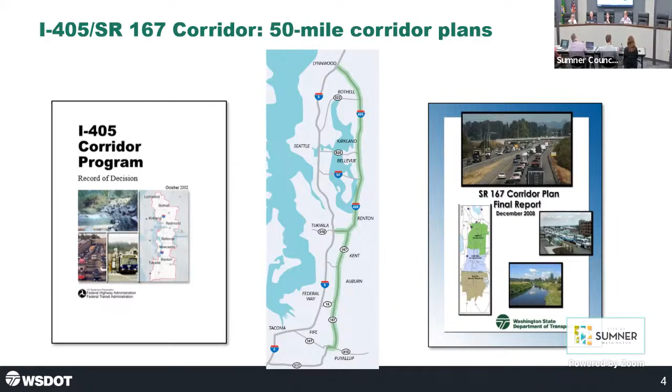On a personal note, I was born and raised in Western Washington. I grew up in Burien, and my family goes back 6 generations here. It's easy for us to sit here today and think about what Sumner, Burien, or Seattle is going to be like. But I remember picking apples in orchards in downtown Bellevue as a kid, and when I was growing up in Burien it was horse pastures where you could go salmon fishing in the streams. That's not what it is now.

I have discussions all the time with people who are new to the area, which is a lot of people, trying to say it's one thing to look back 20, 40, 50 years. It's another to try and look forward that same time period and think, what do we wish we'd done? What forethought do we wish we'd had to get to a functioning transportation system that allows us to build well? Most of the time that's not something our state agency has the opportunity to do, but when we develop a master plan, that's effectively exactly what we're doing.

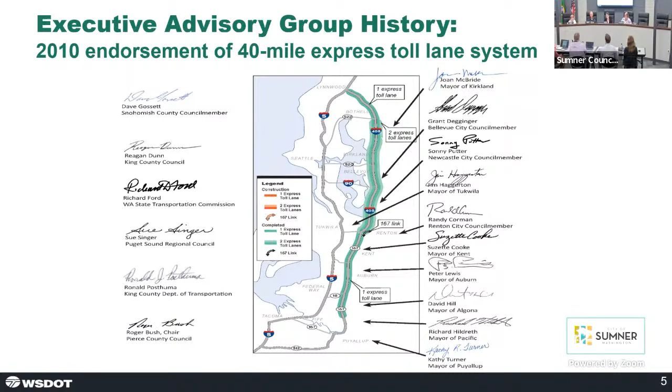There have been a number of these different letters over time, and depending on where we're focused as a program and what the specific needs of that town are would probably explain most of that. Most recently, as we moved forward on a couple of large pieces of the 405 corridor, the letters were really focused on the 405 stakeholders. As we talk about potential next steps for the master plan, the majority of the stakeholders supporting that would likely be in the South—I'm guessing that probably explains it.

The 405 corridor is laid out here, all the way down the 167, essentially the managed portion with toll lanes and HOV lanes. The long-term vision includes dual express toll lanes, new direct access and interchange improvements, high capacity transit—typically known as bus rapid transit or BRT—and non-motorized pedestrian and bike connections.

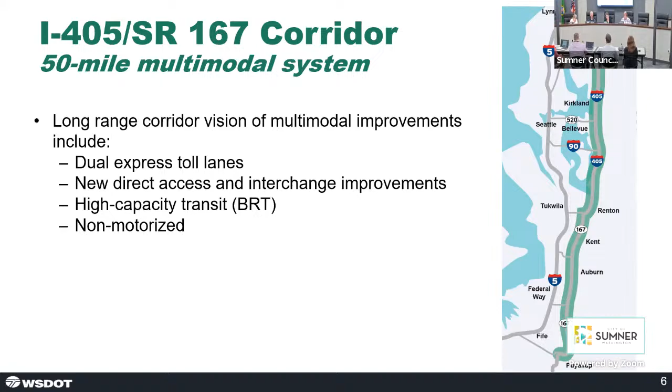We're excited to share that the SR 167/SR 410/SR 18 northbound congestion management project opened last August—I'm sure everybody here has already been driving on it. The $47 million project, delivered by DOT's Olympic region, provides a 9-mile northbound HOV lane on 167. The extension begins near 410 in Pierce County and ties into the existing HOT lanes near Auburn and King County. It delivers much-needed improvements for people in the South End and the State Route 167 corridor, as the new northbound HOV lane completes nearly 20 miles of the managed system. We're pleased to see commuters utilizing the new lane a lot, but while it's an important piece of the puzzle, it's just a piece.

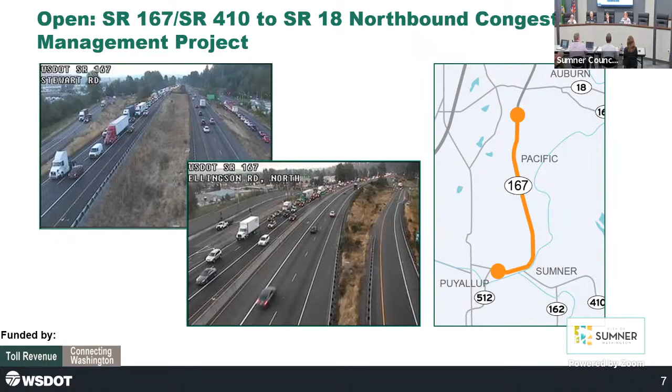So moving on to the next corridor improvements—this is funded by toll revenue through Move Ahead Washington. The next major project for the South End is the 167 Corridor Improvement Project, which will bring benefits to the corridor by adding strategic capacity on 167 and providing system-wide consistency for travelers.

The project will upgrade the really old current toll system on 167 to include photo tolling and destination pricing to help us better manage all trips. In addition to improved management, it also adds consistency. As the council is likely aware, somewhere in the range of 40% of users on South 167 also end up utilizing 405, and it can get a little confusing—I deal with this every time I drive through 167, figuring out the hours, occupancy, and tolling here versus there, plus the fact one place has photo tolling and the other you flip your transponder. We're trying to maintain consistency for a better driver experience, as well as the management of traffic.

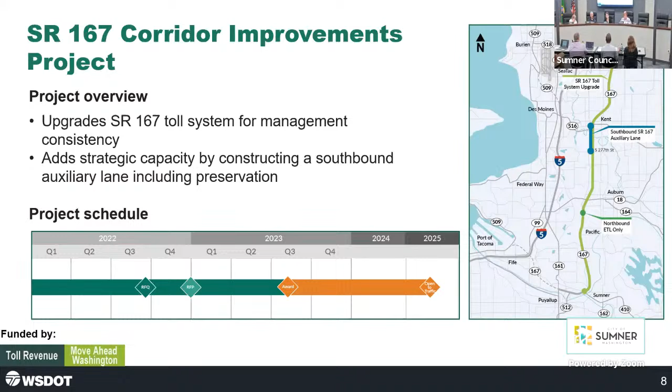Moving on to the next project, funded through toll revenue and Move Ahead Washington: the $83 million SR 167 410 to SR 18 southbound congestion management project, the companion to the northbound lane that's already open. This project will begin preliminary design and engineering this year and deliver over 6 miles of new managed lanes between Pacific and Puyallup.

The project will bring substantial congestion relief to southbound travelers and will nearly complete the 50-mile managed system through the 405-167 corridor. It's expected to be awarded in 2025 and open to traffic in 2028, which aligns well with the opening of the Puget Sound Gateway project from 167.

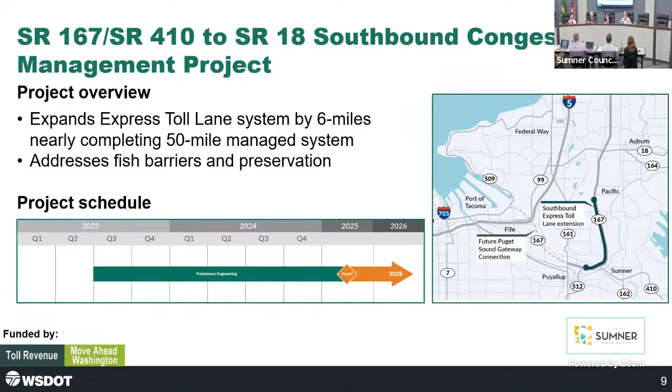Moving up north to Renton to Bellevue - for anyone who's driven north, you've seen a lot of construction on this project. We've been making progress on the Renton to Bellevue widening and express toll lane project. The team continues to work hard to deliver this critical project, which will bring multimodal transportation and safety improvements to the corridor.

This is the missing link that connects the two systems - the existing toll system on 167, and what's been built on 405. This is the link that connects those two, and then we have work on either end, on 167 and north on 405.

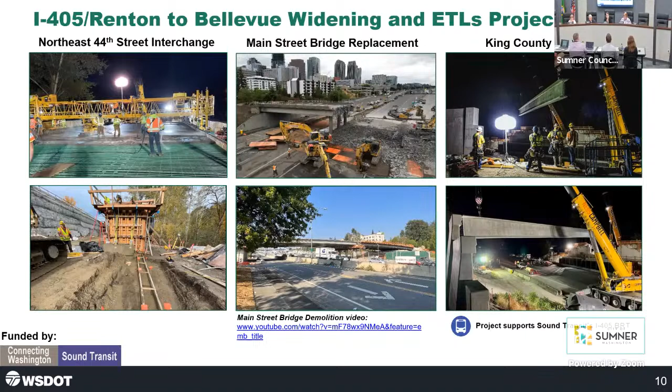This project is currently in active construction. For any of you who use the corridor that far north, as the weather dries out and warms up, this is going to be a very big construction area. You may have already noticed a lot of work going on at the May Creek Bridge.

We already mentioned the Renton to Bellevue construction project - that's a big one, north of $700 million. 132nd is in active construction; this is the second of two seasons, with the current schedule showing it wrapping up later this fall of '23.

The Northeast 85th Street Inline Station project, which is almost entirely funded by Sound Transit, just entered construction. I think I saw my first cones go out last week, and the next couple of seasons will be very busy for that one.

Upcoming, a big one for the 405 corridor that many people from your area will utilize is Brickyard to 527. This is also somewhere in the range of a $500 million project, a very large linear project, including new bridges on the Sammamish River and a number of new improvements to help support the BRT station or BRT system. That's a big one that will be upcoming.

I won't mention the other ones - I already covered the 167 projects you saw in here. If you have any questions on any of those, I'm happy to get to that later. So now I'm going to hand this over to April.

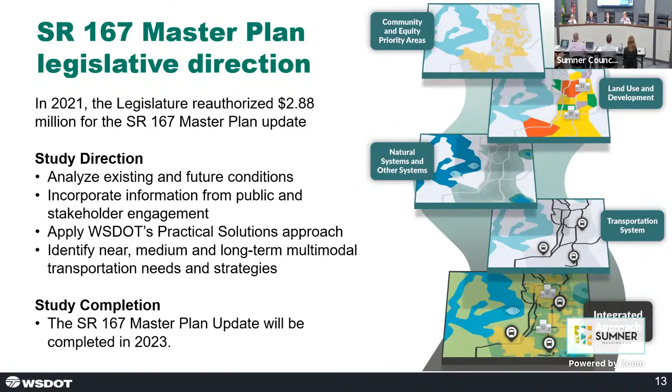I'm going to walk you through the phases on this one. We really approached this in 5 steps, trying to make sure that we were diligent.

That first phase was about listening. As we're walking through these steps, trying to understand what is the long-term vision for 167 and the constituents that live or work down here. What is important to your residents and the people who work in your town? How will we make mobility better, and what are their priorities?

Phase 2, for existing and future conditions, really was focused on trying to understand the lay of the land. What are environmental concerns? What does congestion look like? Where do we have sidewalk gaps? As we're looking at growth, where do we have places and trails? And then future conditions looks at what happens if we do nothing. As we grow and plan for both employment and households, what does our future look like for congestion and mobility if we're not able to build anything? That phase was focused on data, but also on getting our partner feedback and making sure we understand all the pieces as that data comes in.

Phase 3 was really about developing and screening strategies - that's one side of the term, because projects are kind of another form of that. One important thing is this is a multimodal and multi-agency plan. 167 does not happen in a vacuum; it interacts with a lot of local streets, cross streets, and other modes. So we started with local plans, your transportation improvement program, a comprehensive plan, to make sure we understood what are the projects that are happening and planned and cared for by your community that are important to highlight in this master plan effort. Then what are some of the deficiencies on and off 167 that we need to understand and start developing projects and strategies to address. We worked with WSDOT experts as well as our partners to start identifying solutions to some of the toughest challenges for mobility on our corridor.

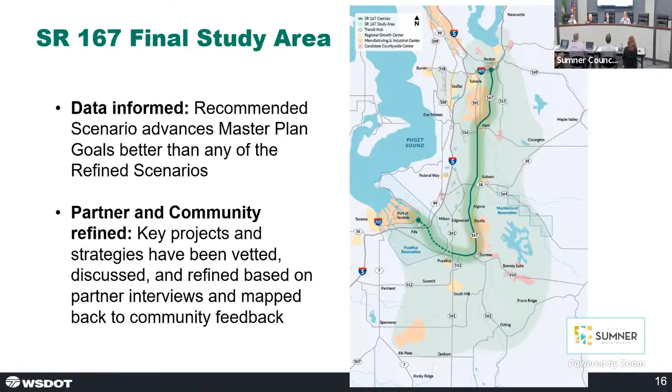A bit on our process as we got here: we went from listening to developing a vision. Where do we want to go? What does mobility need to be on 167? Then to developing our goals, supported by the needs. How do we get there, and what are the key pieces we need to factor in? Our metrics and measures show how we're doing as we progress on these goals, and then that scenario development process I highlighted earlier finally gets us to the final study recommendation. One key piece is that your staff was along the way for this entire thing, giving feedback on each of these steps to make sure your perspectives were shared.

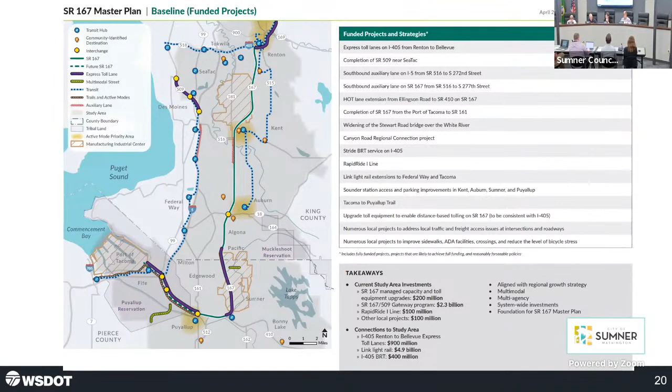A quick stop on this slide - we were not planning in a vacuum as we were going. There are a lot of things going on that form a baseline, funded projects that we really wanted to build our recommendation on. It was important that we leveraged the investments already ongoing, including some referenced by Rob, and build on that going forward to make sure we're increasing mobility.

And then this is our recommendation. I have a full list of projects in front of me, but I'm going to go through a couple that I think are important to mention. One of the hallmarks of the recommendation, more of a linear facility, is a second express toll lane.

For the entire corridor from 405 down to 512, the 167 completion project. This will match the dual express toll lanes that are now going in on 405.

Do we have those in our PowerPoint? You should have this slide, but I also could share this recommendation graphic with you afterwards, because I know it's hard to read. Yeah, because by the time it gets to us, it's pretty small. No worries, I completely understand. I am happy to share that graphic. I'm also happy to share the full list of projects that can be shared by Michael after this meeting. All right, thank you. Oh, no worries.

So another one I thought was important to mention is the 24th Street East interchange improvements. There are interchange improvements all up and down the corridor. One thing we heard over and over is the importance of freight staying off local streets and on 167, but the reality is it interacts with active transportation, which is challenging to make both work. So as we looked through different interchange improvements, this one is really focused on making sure freight and complete streets and active transportation can operate in a safer place as we move forward.

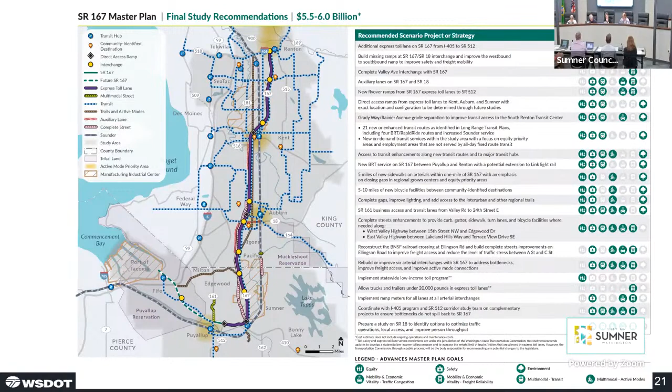Lastly, one thing we heard and found when looking at plans adopted by different cities is that everybody's in a different place in terms of identifying trails and active transportation, from sidewalks to bicycle networks. So we have programmatic buckets for each of those, and we have specific projects, including some in Sumner, listed as efforts already underway.

Quickly, since I know I'm approaching time, on engagement: we reached a lot of people in our outreach last fall. We had two online open houses, the last one ending April 15th of this past month, with over 11,500 visitors to that website and quite a bit of feedback that fed throughout the process.

That first initial online open house was last summer, and we used a lot of what we heard to frame and refine the recommendation and specific projects, to make sure we were putting the right projects in to address issues.

Finally, next steps: we've already had our last technical advisory committee meeting. We have our last equity advisory committee meeting coming up this Friday, and our last policy advisory committee meeting on May 23rd. For the master plan, I shared the draft report with your staff last month, along with a letter of support template, and I'll be resharing that later this week.

We're really hoping to start wrapping this up as we show our work and document the support, so we can start the heavy lift—hopefully together, making it not so heavy—of delivering this vision.

One last piece on that unfunded work—we are working on this. We were talking before with Michael about how we go from here and start getting implementation funding to focus on delivering these projects. That is our next goal.

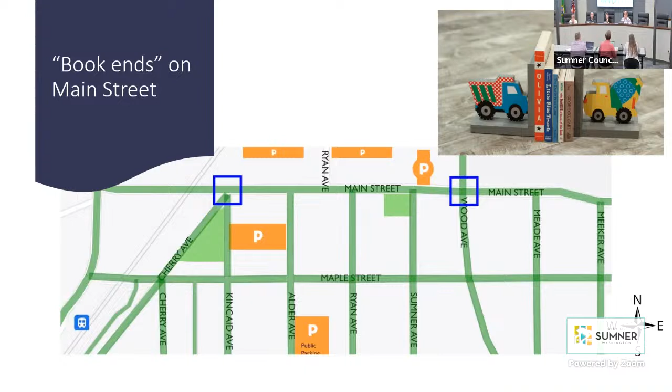But with that, I'll hand it over to Elisa to talk about some of the project challenges that we've experienced and what's ahead in the future.

So we talk a lot about the woonerfs and what we see over at Heritage Park, and that's really the more visible side of the TCUW project. But really what started this whole project, as we all know, is the utilities we were trying to make improvements on underneath. So I grabbed a couple pictures of prime examples of why we are doing what we are doing and currently wrapping up.

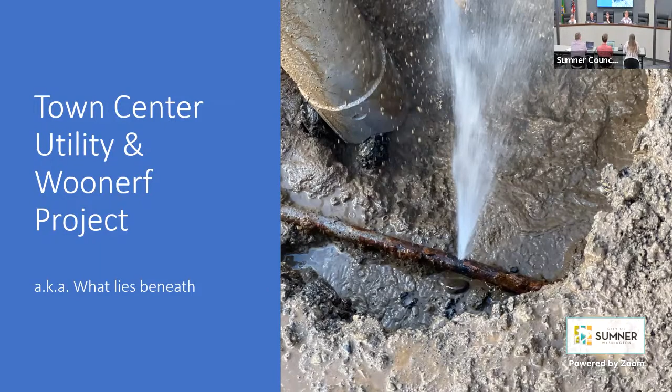This is one of the many water leaks we encountered along the way on our old water lines. This is replacing the sewer laterals on Cherry. Right before we actually started working over on Cherry, we had a sewer lateral break, which was timely - rather have it happen before than after. So that prompted us to replace all the sewer laterals on Cherry before we put them under nice, pretty concrete.

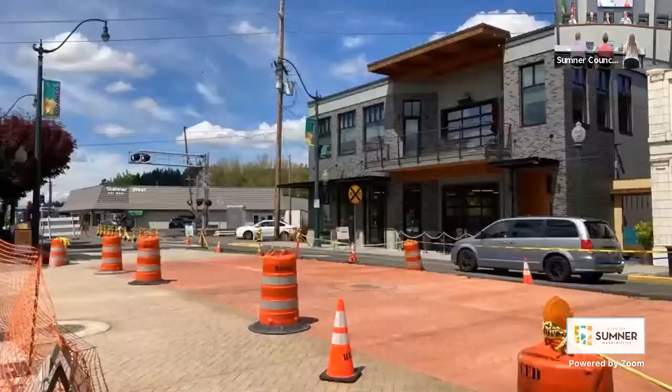And this is one I took this afternoon out at the intersection at Main with Cherry and Kincaid. Half of the intersection is done, and it's really starting to look like our plan - our end goal of nice colored stamped concrete, curbless streets, and really pedestrian friendly.

So this one is wrapping up, if you can believe it or not. I'm not going to commit to any end date yet, but we are wrapping up. We've been very busy in the last month, and will continue to be very busy in the coming month getting everything put back together.

So we have May on our calendar, we have June on our calendar, and July is not really on the calendar yet. I'd say we're shooting to have a lot of work done in May and June, and hopefully a lot wrapped up by the end of June.

On that last picture of the crosswalk - is that a signal crosswalk or just a regular one? There are no signals.

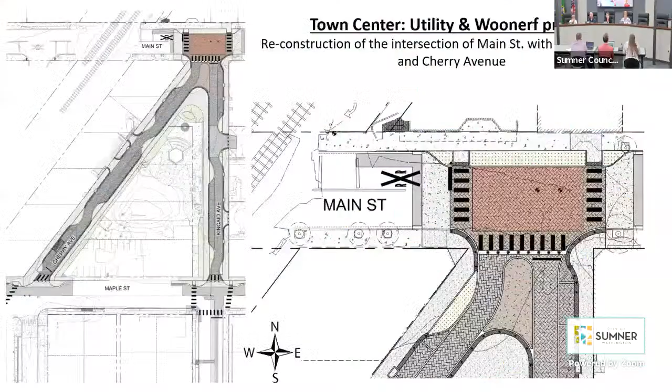So at the top, this is phase one, which we are currently in up on Main Street and wrapping up this week. Next week we switch to phase two.

Elisa, I'm sorry to interrupt you - can you go back to that last slide? This one. Yep, and just tell council what's happening Tuesday and Thursday, because I think that's important to understand the magnitude, and the good things.

As part of wrapping up phase one, we have finished, as you saw in the photo, the concrete intersection at Main, Kincaid, and Cherry. What is happening tomorrow, Thursday, and Friday is that we are grinding and overlaying a number of the streets we have been working on, putting them back together, including a block of Main Street between Kincaid and Alder.

So tomorrow morning, they will be grinding just the south lane, so it'll be in alignment with the concrete we already did, and when we come back we'll do the other half in phase two. Tomorrow morning they grind that south lane, the eastbound lane on Main Street between Kincaid and Alder, and Thursday morning they'll overlay it.

The rest of the streets in this first wave of grind and overlay are Alder from Park to Maple, as well as Academy from Fryar to Kincaid.

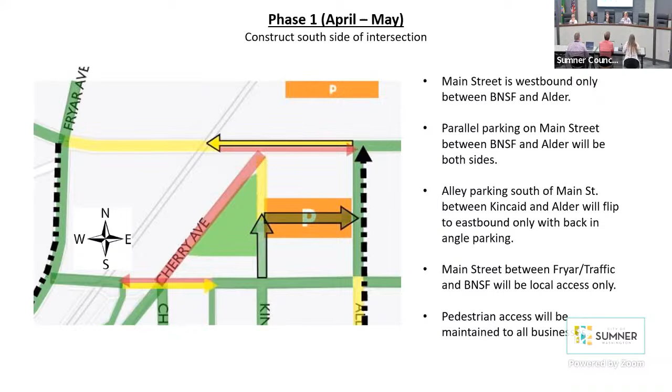Thanks for that reminder, Jason. So phase 2, starting on Monday, we will flip the intersection at Main Street so that it is operating in an eastbound only configuration on Main Street. That means no westbound movement on Main Street between Alder and Kincaid. They will be working on the north half of the intersection to complete that half and the improvements there. There is a small amount of utility work, and then they will start the concrete. We will continue to maintain pedestrian access at all times. That one is expected to go significantly faster. It took them about 6 weeks to do the south side; it might take half the time to do the north.

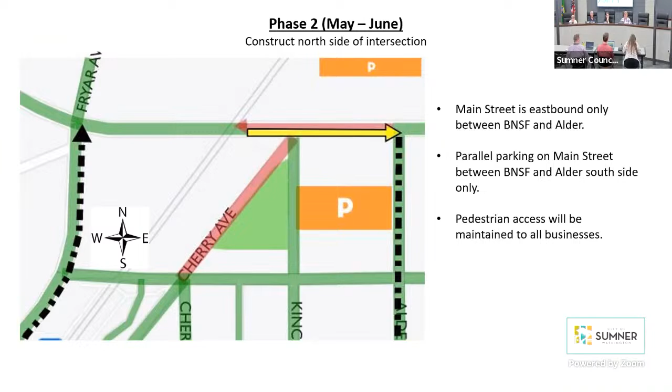So on to Main and Wood, which started last Monday and will continue through spring of next year. They are currently in phase 1, which is 6 weeks of night work. They're doing the utilities as well as curb and sidewalk. That should finish up mid to late June, depending a lot on weather, but it's going very well so far. They're working at night, 7:30 p.m. to 5:30 a.m., Monday night through Friday morning. Outside of those times, the Main and Wood intersection and roadways are open for traffic.

I think they're shutting the railroad down tomorrow too. That's correct, but that is not us — that's in the other projects category. You know whose fault it's going to be, though. We will likely get blamed for it, but it is not us. That is BNSF saying they need to do emergency work on Main Street. So Wednesday night, they are closing.

What's that little road that goes — not the red one — it looks like it goes through the high school kind of? I think that's actually showing Heritage Bank's parking lot. Oh, that's what that is. It's really just zoomed far in, so it's not as far a distance as I think it is. It's their drive-through and the rest of their parking lot. All right, thank you. You're welcome.

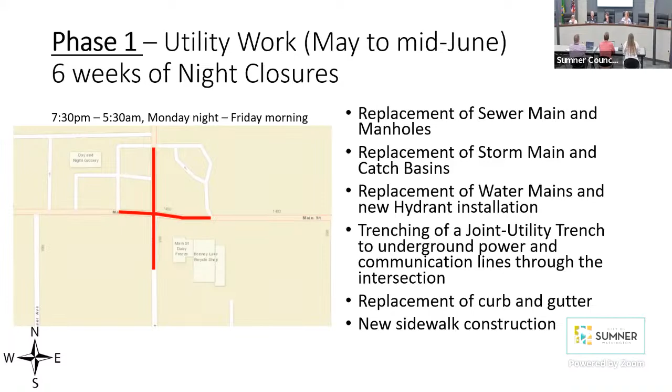So phase 2, which will be essentially July, is a month of full closure at the Main and Wood intersection. That's when we are working on putting the intersection back together, pouring the nice stamped colored concrete, and finishing it all up. So that'll be a month of full closure.

And then we move on to phase 3, where we reopen the intersection. We are essentially just working under small traffic control to do landscaping, site furnishings, bollards, and striping — finishing it up. So by late July, the intersection is essentially done, except we still have our old signal, because the new signal has a very long lead time. We cannot install that signal or poles until we get those, which will be in spring of '24.

So when those poles come in, again under just local traffic control, they'll put up those poles, take down the existing signal, and then we will be done. Hopefully shorter than spring '24, but we're planning for spring and hoping for sooner.

They're on order. I think the contract with the contractor — yeah, April. Our contractor had to do some design work for them, so they started in January, and April was when they were finalized. So we'll be moving forward from there.

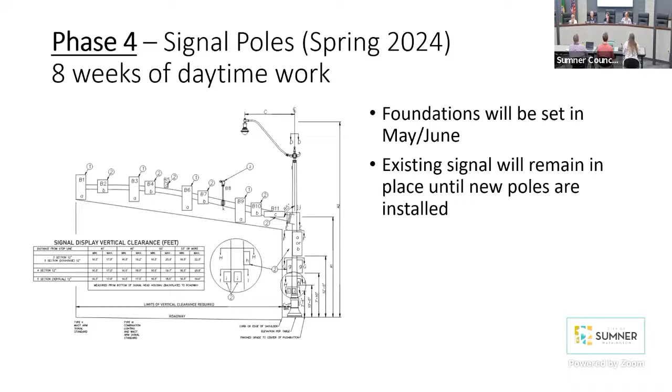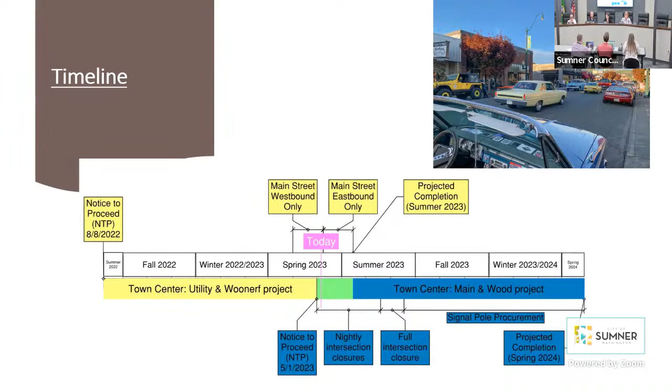All right, thank you very much, Elisa. It was a great project update. I wanted to talk a little bit more holistically about communications and also what's coming up next.

So how are we communicating this to people? We've been communicating in a multitude of ways. The public's been communicating with us. We've had good interactions for the most part, and definitely working on providing as much information as we possibly can to people so they can manage during the construction of this. So weekly project webpage updates - if you're going onto our website, you're seeing those pages updated weekly with new construction photos, new work activities. You can really keep track and watch the whole thing kind of unfold from your computer.

Better Roads Ahead page - similarly, as you've seen that campaign, we've got posters, we've got handouts. It has the QR code. It will connect you to our webpage that shows you what's going on.

We have meetings with area businesses that we've been doing. Well attended. We've run two business meetings, one I think was in March, and then one we just had in April. So really trying to keep connected with the area businesses, telling them what's coming, a week or two of lead time. The next one we're planning is going to be centered more around Main and Wood and the upcoming closures there, once that project goes from night work to the full closure period. So we want to make sure we keep communicating during those major milestones so that people understand what's going to be happening and how long it's going to be happening and affecting their businesses.

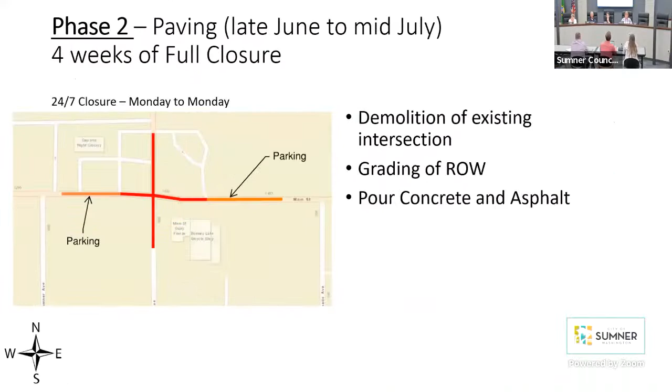Can you explain how parking will work down there in front of the Dairy Freeze? Will people be able to walk through there? Will traffic still be able to drive through there? Let me go back to that picture real quick.

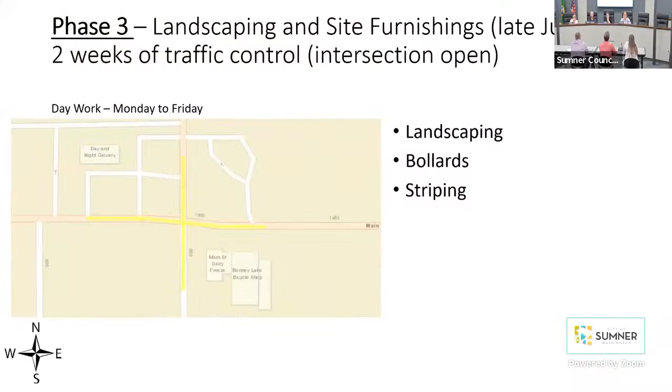Are you talking during construction or post-construction? During construction, that's what I want to know. If you go in there and park, do you have to go back out the same way? On both sides you can see little yellow arrows, it might be hard to see. On the intersection side there is room for a turnaround, so you can go in there. Ideally you'd park and come right back out, but should there be a need, there is room to turn around. So down at the end of what you have cordoned off, there will be room to turn around and come back out again. Yes. Okay, all right, thank you.

I like the bollards and the crosswalk.

Okay, so we were done with that one. I just wanted to demonstrate one of our maps. You might have seen some of these before, but this is one of the maps we produce on a weekly basis showing where you can drive downtown. This map used to be smaller, but it's gotten bigger, primarily because now it's encompassing Main and Wood and more of the streets around there. You can see a lot of the areas are all green, and the blue denotes that it's closed 7:30 p.m. to 5:30 a.m.

We're really trying to use this as a communication tool, so it doesn't matter which project you're concerned about. We don't want to route people to a project page that just says what streets are closed for that project. It's really the holistic view. Here we have a number of projects, here's all of them, and here's where you can drive. We continue to update it on a regular basis, weekly, and more often if things are changing more frequently. We'll be updating it shortly when we have our phase 2 traffic switch out here at Main and Cherry.

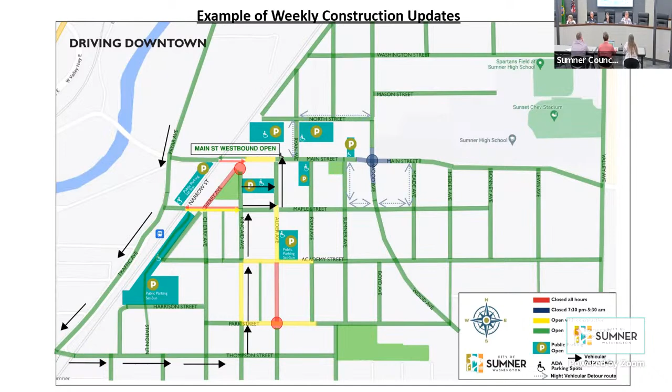In addition to that, we also have a sidewalk access map that we've created. We wanted to convey to folks, hey, I need to walk somewhere, what's open, what's not, what sidewalks can I use? We're updating this just like the other map. It really shows all the different places you can walk, and for the most part most walking routes are open. Even in the areas where you see red, closed, there's still a very faint yellow line around it that says open with construction.

There was a period of time where we had to close part of Cherry Avenue due to some work happening underneath the sidewalk. But our priority is to try to maintain those pedestrian and non-motorized paths.

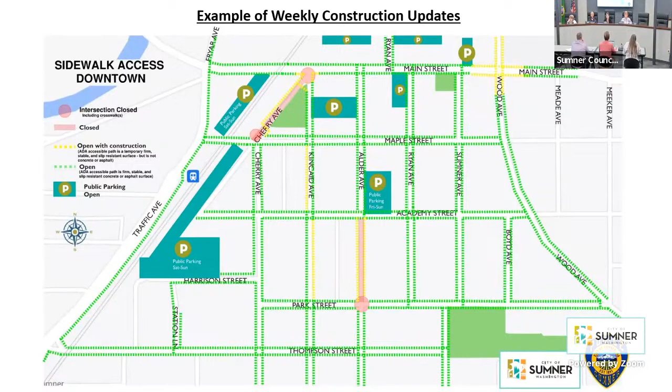Another way that we communicate with the public... so that kind of gets us to, wait, there's more. We have a few more projects in the wings. Most of them are not our direct responsibility, but there are more projects that will be affecting traffic during the rest of the year.

But the intersection closure there is going to be really challenging. We've been working with them to try to talk about how challenging it will be, and they've had a number of traffic control plans that they've been reviewing. Also likely to be mostly night work. So will it stop there and go across the bridge, or will it go straight through? It's going straight through, but it connects there too. So there's a lot of work going on. It's going to be a very busy place for a period of time.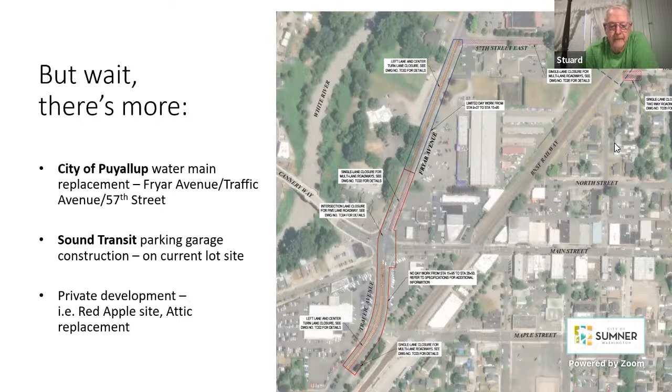Click on that PowerPoint. Here, or the one before, that one. Oh, do you want me to take it? Go ahead, okay.

Regarding the Dairy Freeze, it's notable that we're in a really peak time for them. I have some hope that people aren't just driving by, but going there as a destination for those nice summer evenings. What's interesting is it's going to be much quieter from a traffic perspective through that area. Part of us hopes it turns into a really lively area during that time period. Maybe that's a little hopeful, but them being at the end of a cul-de-sac in a way, with plenty of parking, it could work out. I'm not sure how it's going to turn out.

I don't think he understands how you're blocking the street off to accommodate them. Okay, go back to that.

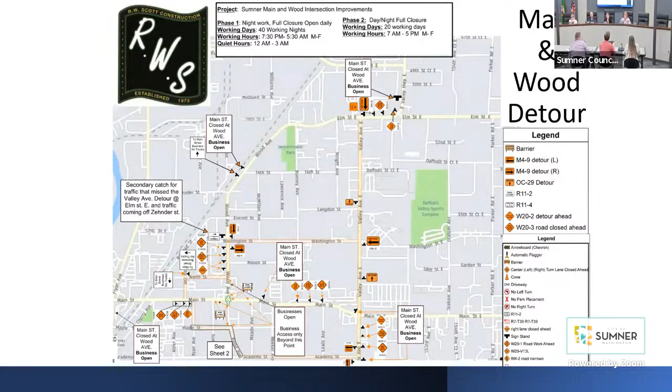Before we switch, Mr. Stuard, we did spend considerable time talking to all these businesses on whether to close it fully or leave it open partially. They were very much in favor of just closing it and getting it done. We also had considerations with timing with the school district, because the last thing we want is this going into the next school year, which would affect bus transportation for the district. No, it's a big can of worms. There's no real good solution to any of this, but this is the best solution.

I appreciate the efforts you put into it. My heart goes out to those people if this is going to impact their business at all, they could go out of business. The same guy who owns the bicycle shop owns the Dairy Freeze. I just hope there's some way the city can support their need to meet their customers' requirements.

We definitely did. As you said, we really targeted the best ways we could to shorten the schedule. Working with the contractor, they had 100 working days to complete the project, where there was potential they had to maintain access through the intersection on Wood Avenue. Working with them, we went from a 100-day potential closure to a 40-day night work and a 20-day closure.